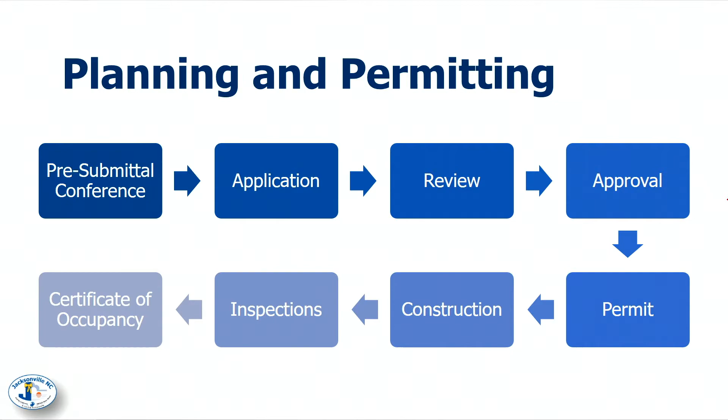Building inspections enforce and administer the state building codes. These aren't locally adopted rules, they're actually from the state, and we simply administer them locally.

The building inspectors are very involved with disaster recovery, and they also assist our zoning and code enforcement officers as it relates to minimum housing, whether residential or commercial. Most of their days are spent in the field performing those inspections.

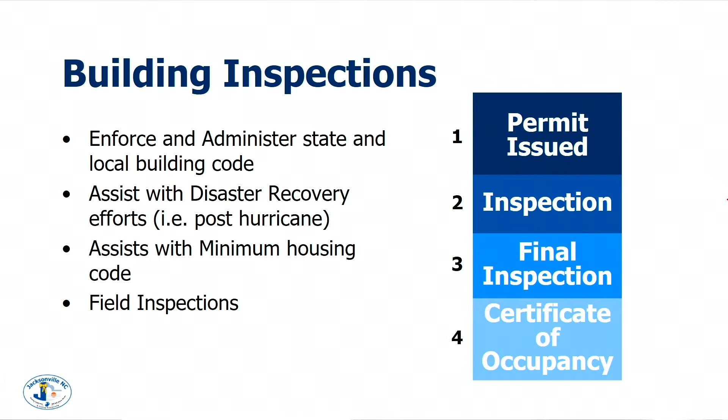So with that, that's the boring overview, I'm going to turn it over to Jeremy to discuss the development overview, because that's more exciting, where development is occurring and what's going there where we see those buildings framed up. What's going to go there? A lot of times they'll put a sign coming soon, but sometimes they're just out there doing site clearing and you're not really sure.

Jeremy's going to go over a lot of those projects that are either under construction or in the pipeline, because that impacts our overall water and sewer basin. So with that, I'll turn it over to Jeremy Smith.

Thank you. Again, this is a development overview. I'd like to say it was brief, but we are busy. Even with the COVID-19 pandemic going on, we have stayed steady, especially on the commercial side and increasingly on the residential. The first two slides are just a bulleted list of things we've had going on.

Most of you are familiar with the Gateway Marketplace, that's where Publix, Michael's, and Ulta are. When that development was approved, they had 6 out parcels. 2 of those have now developed into mini shopping centers or tenant spaces. I believe we have Blaze Pizza in one of them, and most recently the Wingstop opened. We also have the Burrito Shack, which is under its upfit construction right now and should be opening soon.

As of today, we did our first review on a physical therapy clinic, which has touted itself as one of the top or largest in the nation. We still have 4 out parcels that can be developed, be it tenant spaces, standalone restaurants, or drive-through restaurants, though we have yet to receive any indication or interest. As of today, we're also wrapping up some things with the Gateway Marketplace as a whole, not the out parcels, and hopefully have that completed very soon.

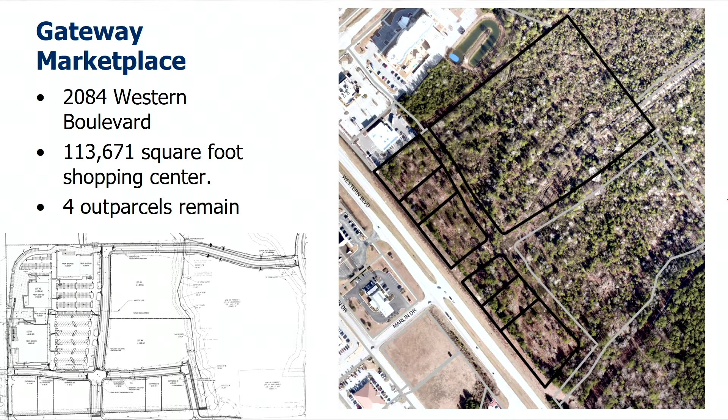There's what was identified as the second phase, which is the large tract on the right. That is not under the ownership of Gateway, but it's certainly a large 7 or 10 acre tract of land that could see additional development sometime in the future. It's not technically part of Gateway at this time - once it gets developed it'll probably take on the Gateway name, but that's not part of the first phase, so we're not sure what may happen there. That's the section between Gateway and Commons Drive.

Carmax - this map doesn't show it, but there's actually 2 parcels there. One rear parcel will be home to the regional stormwater pond for that North Marine Town Center shopping area. But Carmax will be up closer to New Bern Highway. We expect them to hopefully start construction again soon - they still have their equipment out on site, and their signage has been constructed, so it's very obvious where they're located now.

You'll notice at the corner of Piney Green is the Circle K, and across Piney Green from that was the old Kangaroo, which was recently demolished. We expect to see some development there in the next few years.

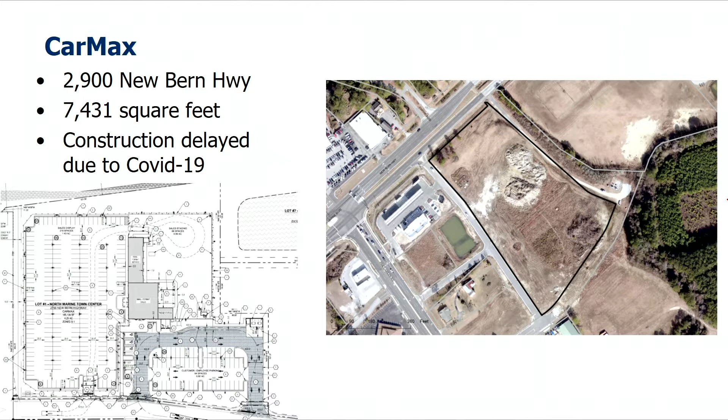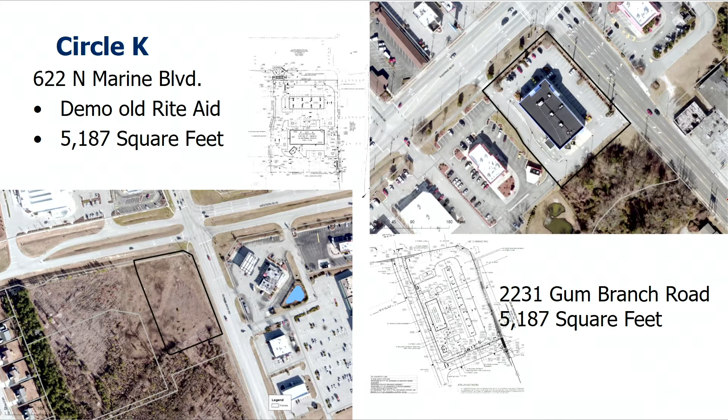Circle K, you may have heard they're on a very large national tear of new development. These are just 2 of the locations in Onslow County - they have several other locations, not just in the city. We have opportunities to work with them at the corner of Western and Gum Branch, directly across from the Speedway on Gum Branch and Western. They'll have access via a driveway and future street onto Gum Branch, and access off Western Boulevard as it goes into Williamsburg Plantation. Their other proposed location, which has received site plan and building permit approval, is the corner of Onslow Drive and North Marine Boulevard - the old Rite Aid or Eckerd's location. They're going to drop that building, use their current driveways, and build new.

Gum Branch Crossing is a new proposed shopping center currently under construction, across from River of Life Church's new site on Gum Branch Road. It's proposed with 20 unit tenant buildings, though more often than not we see with these tenant spaces that they combine units, so it may not be 20 actual tenants in the building, but they do have that capacity. Currently, there's a self-storage facility also in review with this project.

We expect that to be going to the city council in the next month or so. They are currently finishing up their TIA scoping and development to determine what improvements they will be on the hook to do on Gum Branch Road.

Along with a lot of the other development we're seeing there, you'll see in the next few slides - is this right next to where Lowe's Foods is? Yes ma'am, it'll be on the other side of the stormwater pond that's to the rear of Lowe's Foods. That side entrance you can go in if you're coming from Richlands will front directly onto that. It'll actually be behind the 20 unit shopping center, so you'll have a bricked up

Climate controlled storage - I think they've compared it similar to the climate storage there on Market Street as you go into Wilmington. It's a brick facade facility with windows on the front. You would be hard pressed to know it was storage until you got into the site.

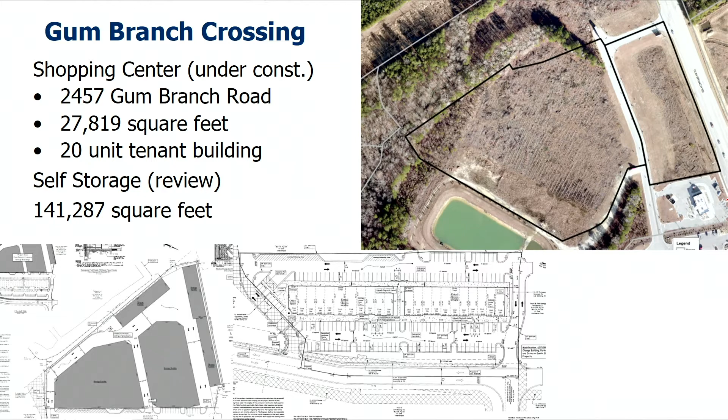It's gonna be like a strip building now, not another whole giant shopping center. But because of the way the Unified Development Ordinance classifies a multi-tenant building, it's still classified as a shopping center.

Moore's Barbecue is directly across from Gum Branch Crossing. It's under construction as well right now. They will use the access driveway that goes back to River of Life Church - no new driveway on Gum Branch.

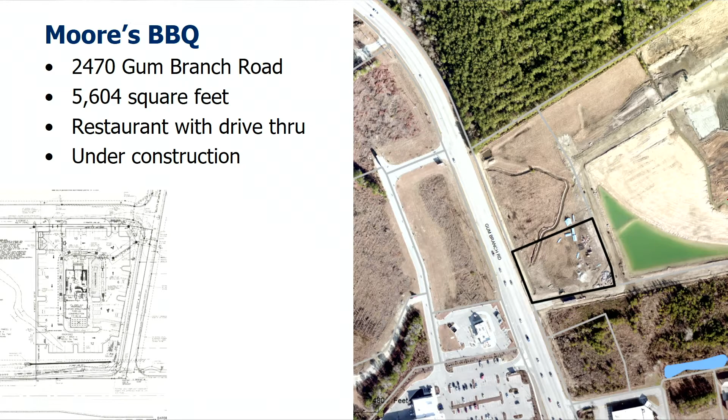I do not have an ETA on their completion, but I do know they're steady at work. It's framed up now, I think they're starting to put the roof membrane on it. If you've ever seen a Moore's Barbecue, it'll be unique with the outside cooking and whatnot, and it will have a drive-through facility.

Smithfield Chicken and Barbecue - what I've been told is their legend site, one of the first built in North Carolina, there on Gum Branch Road, is proposed to be demolished as part of their rebuild. They recently purchased the old Marine Federal at the corner of DeWitt and Gum Branch. Their plans are to come in with a 2-phased site plan, which we are currently under review. They will drop the Marine Federal building and rebuild a site-sufficient location.

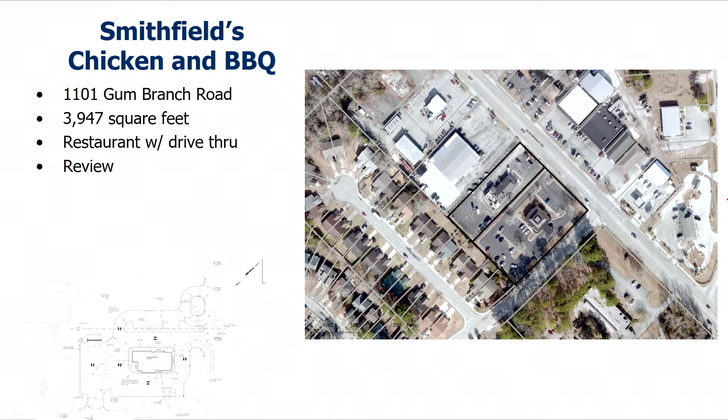Once it's operational, they'll move their staff and employees over and then drop the original site, add some additional parking and a large green area for outdoor picnicking - it'll be a green grass area. We are currently reviewing that, and they've got some driveway issues to overcome because they have multiple driveways with those sites, but I expect to see it probably approved before the end of the year.

Splash and Dash, this is at the corner. I did not rotate this map, it is flipped, I apologize.

This is at the corner of Commerce and Western, used to be an auto sales lot, I can't remember the name of it. They had a modular office building at the back of the site. If you go by there now, it's completely down. They've primed the site, built it up, and they're paving and going vertical. They are currently working on a site plan modification because they ran into some issues with overhead power lines in their dumpster location.

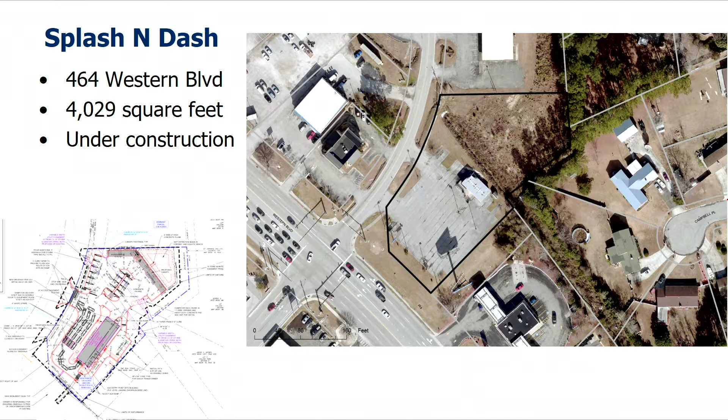But this will be a similar development in terms of operation as what is now, I think, the 3-minute wash, but it's a Splash and Dash on the other side of Western, down on Northwest Park, near the State Employees Credit Union.

Clean Green Car Wash, I'm gonna jump us all the way to the other side of town, near Freedom Village. This is the old State Farm Bureau building. They have since dropped it. It's right beside O'Reilly's Auto Parts.

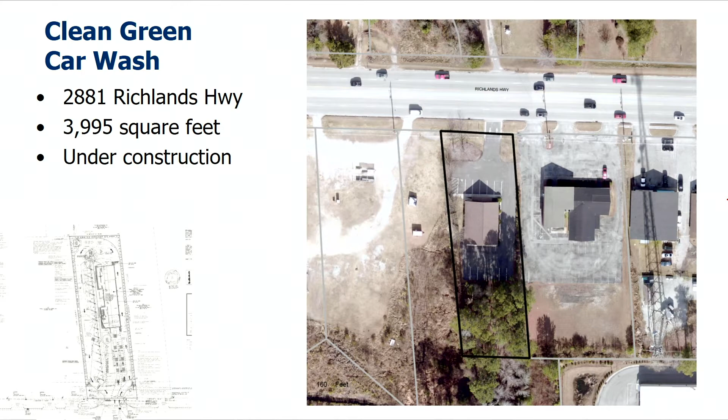They've been going pretty quick, and to allude to that comment or question earlier, I think Clean Green, with their name, as Mr. Hunter has said, they pride themselves on reusing their water. That's kind of their motto.

Lidl, this is a very, very early conceptual plan, as they are going through a traffic impact analysis right now. This is the corner of Parkwood and North Marine.

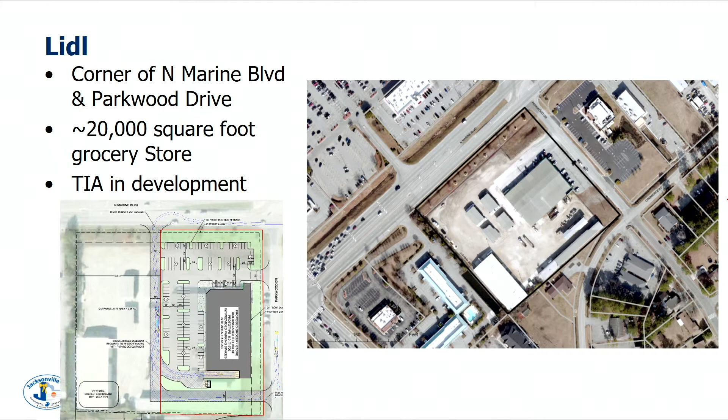Garris Evans, thank you very much. It's been a long time, I think, since the city's seen some development at this intersection. And Lidl, along with an out parcel that we'll be developing as the Garris Evans is demolished, will be going there.

Lidl is comparative to Aldi. They're very similar companies, but they are not related, they just have similar names. They're both German-based companies. There's a Lidl in New Bern and Kinston, so if you have an opportunity, you can see them. They have very nice buildings, a lot of glass. Wilmington has one, right at the corner of Eastwood as you turn off for Military Cutoff.

One of them may be Kinston, I don't know. They closed Kinston about a year ago. They never did do well over there. Yeah, and there was one other location, I don't remember where.

But it is what it is. They're still moving forward here, but obviously anytime we hear stories like that, we have concerns. But you can't run their business for them, we process them as they bring it in, and they haven't told us that they're not coming forward at this time. It'd be a new place for a mini storage.

Or a car wash. They've executed the TIA and they're going forward with that, and the out parcel, no idea what it is, but the TIA, and I don't mean this negatively, but worst case scenario, the TIA will assume it's gonna be like a drive-through or a high volume type business.

Moving on to residential, this is the Vineyards, what was it called back then? It used to be Cypress Creek Village, that's what it was. But it's been the Vineyards, I think, for a while now.

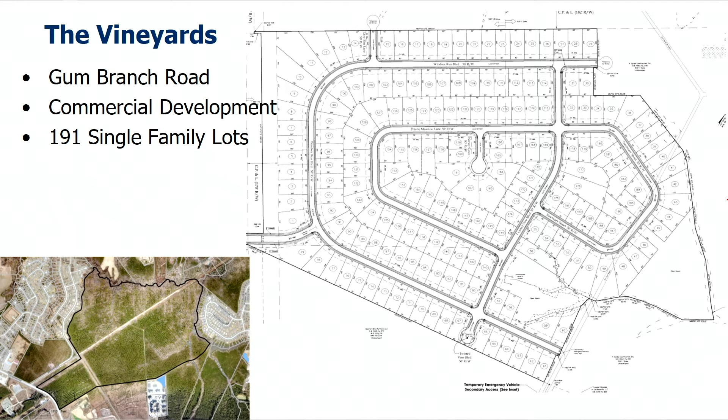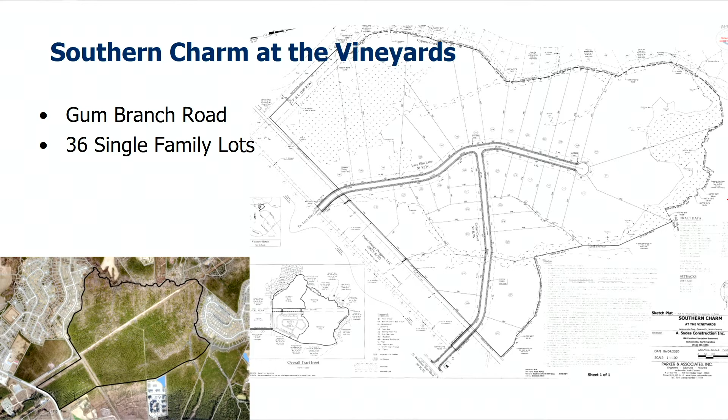I'm going to follow Ryan's presentation with impacts you can expect to our wastewater system. As Ryan was mentioning, this is another part of the vineyards - we're seeing the sections of this come in right now. Their first phase is Southern Charm and another section, similar to how Williamsburg is broken up into St. James Park and Huntington, they'll also have subsequent phases for this subdivision. Just to the north is Southern Charm at the Vineyards, with much larger lots, tying into two proposed streets, and this is 36 single-family lots.

Moving over to Drummer Kellum Road, this is to the south, closer to New Bern Highway - 95 single-family home lots proposed. Actually, I may have misspoke - from what I understand talking to the engineering firm, this one is supposed to start construction in the next week or two, so this is actually ahead of the Vineyards. This is off Drummer Kellum, on the north side of town, off New Bern Highway, between Ramsey Road and New Bern Highway.

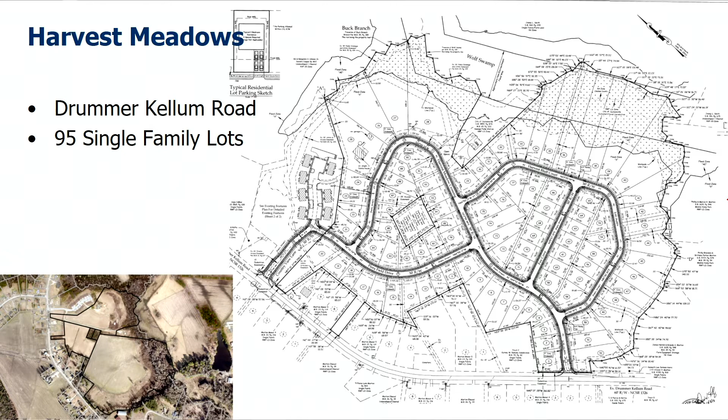The Country View Apartments to the left on the map are established, and it's the same developer tying in. This was annexed some time ago as well. There's a pump station in this development area, in fact it may be the square back there in the middle - it is. And this is a satellite annexation - yes, I believe it is, sir.

Crescent Ridge on Ramsey Road, this is moving to the other side of Carolina Forest. This is 68 single-family lots. It will tie into the backside of Carolina Forest. I believe that was Savannah Drive is where it'll tie into, and then it'll have access directly onto Ramsey Road.

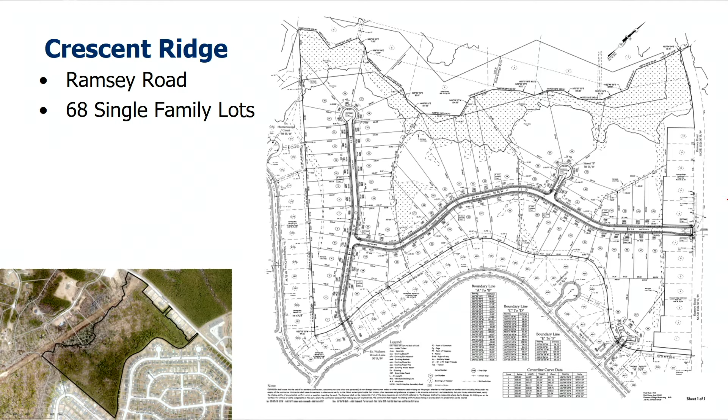While I did not highlight it, we do have the city recently annexed the property directly across from this on Ramsey Road, which is owned by the Teutons. Little Creek Estates - yep, and we expect to see some forward movement on that too. About 155 single-family lots on city infrastructure.

And I'll wrap up with this as it's under construction. I live in this area and I get a ton of questions on this development. This is the old Blue Creek Southwest Strawberry Farms on Blue Creek School Road, across from the Southwest soccer fields. This is Springfield Apartments, an 80-unit apartment complex. It's currently under construction - they're still priming the property, leveling, grading, what have you. Same developers that developed Wingate Apartments over on Fairway Road, near the Kia and Hyundai dealerships.

And this will tie into that pump station that was just installed in the southwest area, that is actually the only tap, I believe, that tapped our force main. So will this be the first tenant, or have we taken on some existing customers? As part of the agreement with the installation of that pump station, we partnered with OMWASA, and we took on - I think it's called Springdale Acres. They had a small package plant, and that plant was failing, and the state stepped in and approached OMWASA about taking it, and they approached us about partnering and constructing a wastewater lift station right there at the soccer fields, if you're familiar with that area.

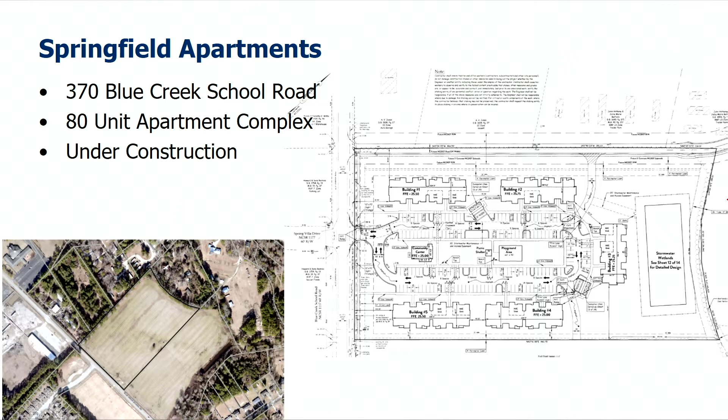There are a couple of developments I didn't include on the presentation because they're not the exciting ones, so to speak. We have some dental offices over in the Office Park area, one on Cliff Court that's under construction right now. And then another dental office that we are trying to quickly wrap up the review on - I cannot remember the street that one was on. Is that Office Park? Office Park Drive, Eastern Dental - they have a doctor and they have their initial upfit and building drawings in, just waiting for the site plan approval.

But with that, I'd be happy to entertain any questions Ryan or I could answer.

Like I said, COVID has not slowed us down. In fact, I think once we went into shutdown, everybody said it's always an opportunity - well, let's get all our plans approved, because we went into overdrive in terms of plan review. I think when did we shut down? April. We had one of our busiest submittal dates in the last two years.

Jeremy, have you had any inquiries about the large vacancies at the mall - the Sears and Ulta? You'll laugh - I've had someone ask about doing mini storages at Sears.

I did fail to include, but Piney Green Shopping Center, the old Kmart there, Bailey and Associates - Monday night the planning board will be considering a recommendation on approval of retrofitting the interior for climate-controlled storage, Kmart sized. And then we will be taking that to the city council, if planning board makes a recommendation, on October 20th.

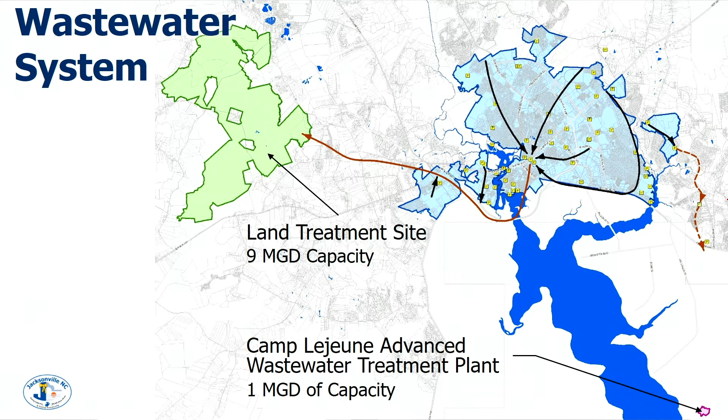Again, I say 10 permitted because there's a whole lot of factors that go into that, but our permitted capacity is 10 million gallons. We have in the blue area, which is kind of where I'm going to focus today, about 230 miles of gravity sewer and 46 city wastewater pumping stations.

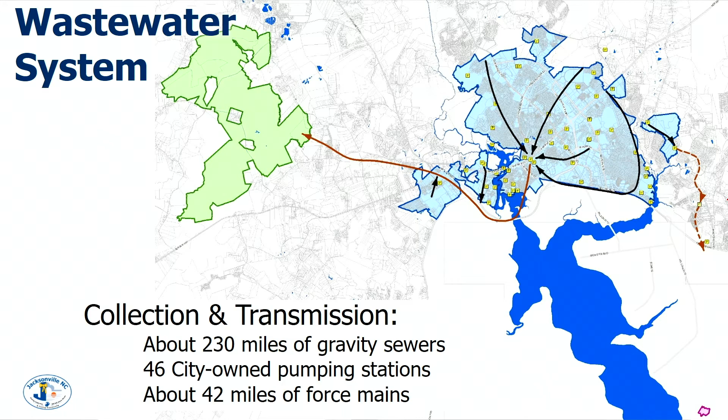For those of you that have driven down Bell Fork Road, a typical one would be the wastewater station we have right there - it's on Bell Fork Road, right beside the fish market. That's kind of a medium-sized station. And then, of course, our largest, most famous one is the brick building right in front of Courts Plus - that's our main pump station. Almost all of the wastewater in the city that goes out to Land App comes through that main pump station, then we have one force main out to Land App, and that's a 36-inch force main.

And then we have 42 miles of force main - so those are the mains that connect the pump stations to gravity sewer. Basically, Jacksonville is pretty flat, so what we do is we carry everything that we can by gravity sewer.

So there's no pumps or anything associated. It leaves the house, and gravity basically carries it to the lowest spot, which is where we set a pump station. And then we move it again, typically to another gravity sewer, and bring it until we get it to the main pump station. So we have 8 collection basins. Basically, those are those larger pump stations that eventually move it to the main pump station. You will see that the main pump station does have its own basin of wastewater that flows directly to it through either gravity mains or some smaller ancillary stations.

But tonight, what I want to do is focus on two of those, the Henderson and the Brookview basins. The reason I want to do that is because much of the development that Ryan and Jeremy talked about is within those two basins, especially notable as it would put pressure on our water and wastewater system. I'm not saying the other developments aren't as important, but they don't put as much pressure as a 500 lot subdivision does, or a gateway marketplace commercial development.

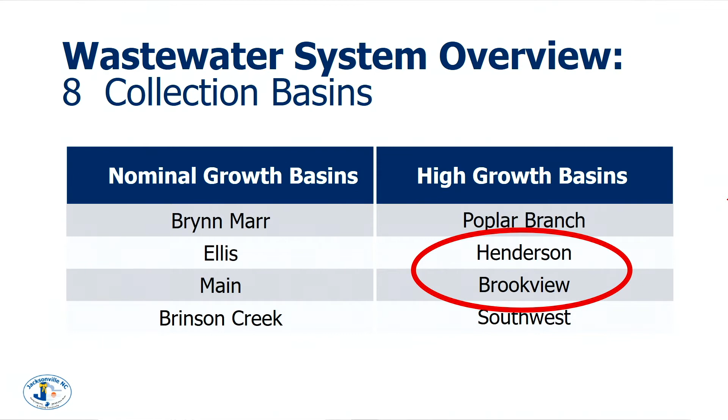So what I want to do is focus on those two. I mentioned that as we're meeting with those that are speculating on parcels or those looking at developing parcels, we take notes. We do have some master plans as they relate to sewer. We started with an overall system master plan in 2006. Before that, all we had was a few engineering reports, but we did not have any sort of formal master plan. Then in 2011, we updated that master plan based on the development that had happened, and again, additional speculation that we had seen or talked with potential developers.

In 2018, we did a small area plan tied in with the North Marine Town Center area, which is right there at the intersection of Piney Green and 17. We also looked at the Patriot Park area. So that master plan was wrapped up into that Piney Green North plan. What we did is look at, with those two developments as anchor points, how far out or what improvements we'd need to serve out 17 North. We looked just as on a fringe out as far as about the pit out there on 17 North near Morton Trucking. So just to give yourself a boundary, that's about how far we looked out.

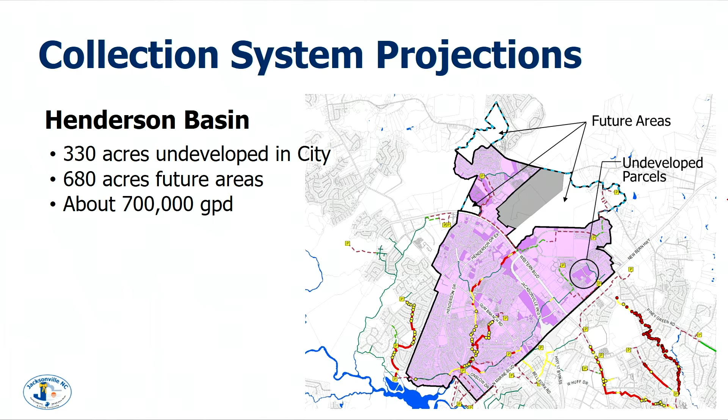You've got Gateway in there too—thank you for pointing that out. Gateway is actually in white in one of the future areas, but we highlighted the area beside it because that's where we originally had discussions with people looking at that property. They were actually looking at the parcel beside Gateway, not the parcel that ended up being purchased and developed. So that area has now come into the city and taken up some of the additional remaining capacity we have in Henderson Pump Station.

Wally? Yes, sir. You mentioned some of these areas would require extensive infrastructure—is that going to be paid for by the fee we used to call the facility fee? I'll get into that too. Or will that be over time, or will they have to pay that up front? I'll get into that too. Thank you.

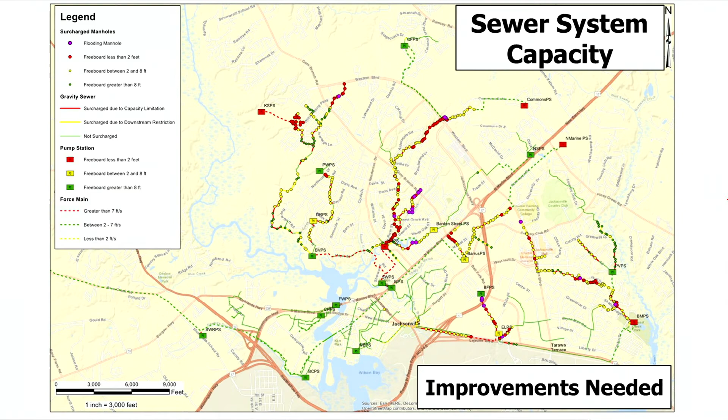You can see there are a lot of improvements needed. I'd like you to focus primarily on the left of this picture, on Highway 17, that straight line running right under the Y in capacity. If you focus to the left, that's really the majority of the improvements that are needed.

So one option we looked at is, instead of making all of those improvements, is there something else we can do? Which goes to Dr. Rashash's question about these basins. What we've looked at, we have the master plan that supports this. We've actually done all of the design and acquired all of the right-of-way to construct this project.

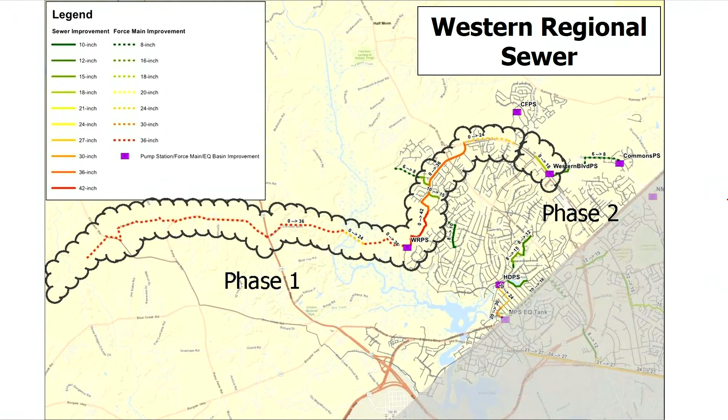Now, this lift station would not just serve future development. It would actually enable us to turn some of our existing wastewater, such as Carolina Forest, that whole development, into this system. So there's existing benefit, because one of the things we find under heavy rainfalls is we have challenges in that basin already. This helps relieve some of the pressure and eliminate improvements we would have to make in that basin, even to see modest growth.

Well, if you go back a sec, sure. I have a question, and it's one of those weird piping questions. You have a 36-inch pipe on one side of the river, a 36-inch pipe on the other side of the river, and a 24-inch pipe connecting them. Why?

There will probably be 2 pipes going under the river, which is a very similar design to what we have on our 36-inch force main now. Because that crossing is so large, instead of doing one 36, you would do two 24s for safety. That would make me feel a whole lot better. Okay, yes, that's why it's a 24.

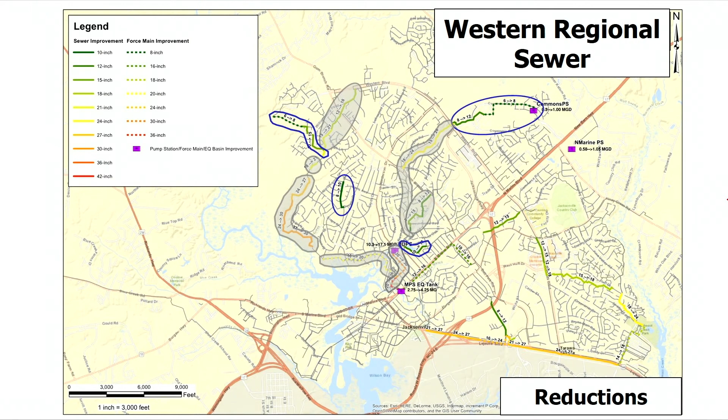The one that throws us off, and we can't figure out why the model throws it out, is that bottom circle. There's really not a whole lot of development proposed on that line—it kind of goes along and then stops, doesn't go all the way out to 17 or Western Boulevard or anything. So we're not sure why that one highlights. We think that's a calibration thing along that line. But that's something we'll have to figure out, and the rest of those would go away.

This is what that service area would look like. I showed you the Brookview Basin and the Henderson Basin, the size—so this is kind of what that project would be able to serve.

Now, you'll notice I put a break in there, a phase 1 and a phase 2. With the project I just showed you, and I'll give you a better highlight of that project in just a second, it would only go to phase 1. But in our master plan, we identified a phase 2 that would help us serve development potentially all the way out to Ramsey Road and around almost to Drummer Kellum.

And this is kind of the highlight of what we looked at. The important thing to remember is we're going to have to do improvements at some point. But we also—this is a major project—we don't want to invest $35 million in a project that isn't needed right now. So while we've done all of the engineering and we've acquired all of the easements and right-of-way that we'll need, we actually have all of the permits.

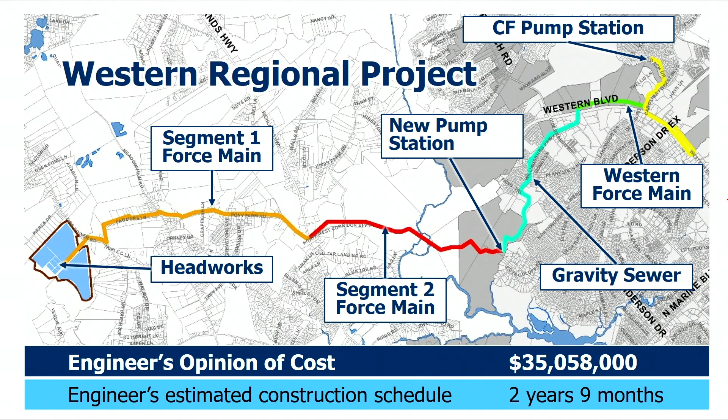We'd have to directional drill underneath New River here, and that directional drill is over 1,000 feet long. That's not something that you just set up and do easily. So this is a major project that we've got.

The other thing is, the last time we updated this engineer's opinion of cost was somewhere around 2016 or 17. So what we're currently doing is watching the development, but we're also working with the engineer to update their opinion of cost because, four years later, you can expect prices to likely be higher. This is one that we need to monitor.

The other is, are there other funding opportunities? I can tell you about every time somebody brings me a grant opportunity. After Hurricane Florence, there were all kinds of resiliency grants out there. This is one of the first things we go look at, could we find some sort of alternate funding source to help offset the cost? Now, I can tell you we haven't been able to pigeonhole it into a grant yet, but that doesn't mean we won't keep trying.

We've also looked at public water supply low interest loans. Sometimes they'll do principal forgiveness for a portion of their loans. So those are other things that we're looking at. And then, of course, the way we funded the land application site was revenue bonds. So that's also a possibility, and right now, the revenue bond market is fairly favorable. So those are things that we'll continue to monitor.